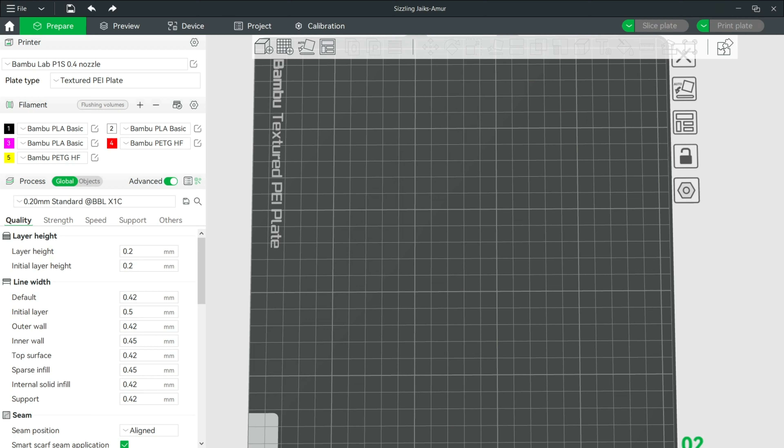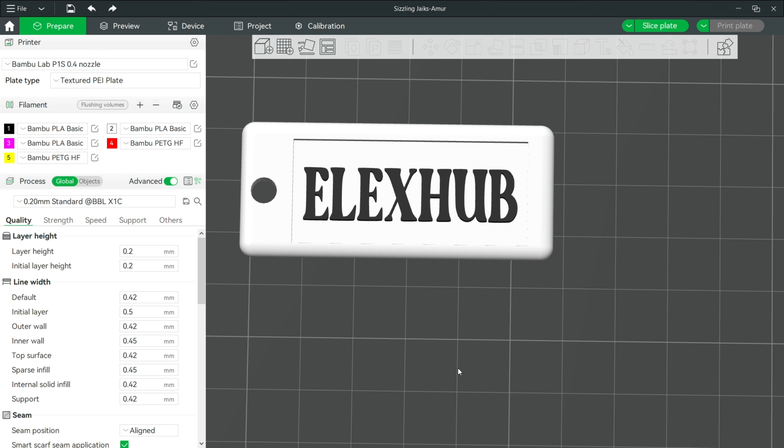Kung nagsisimula ka pa lang sa 3D printing, mahalaga maunawa ng infills for optimizing both the strength and efficiency of your prints. Infill patterns ay ang internal structure ng isang 3D printed object. Sa halip na isang buong material throughout, infill patterns create a framework inside the object. This framework affects how strong or light the 3D printed object will be, how much filament is used, and kung gaano kabilis ang total printing time.

Once you have added your object and done preparing in Bambu Lab Studio, proceed to the Preview tab located on the upper left corner of the studio. Under the Process tab on the left panel settings, click on the Strength tab, scroll down until you see the Sparse Infill section.

Ang sparse infill density refers to the percentage kung gaano kabuo ang internal structure ng object. 100% means solid throughout. Higher density results in stronger prints, longer printing time, and more material usage.

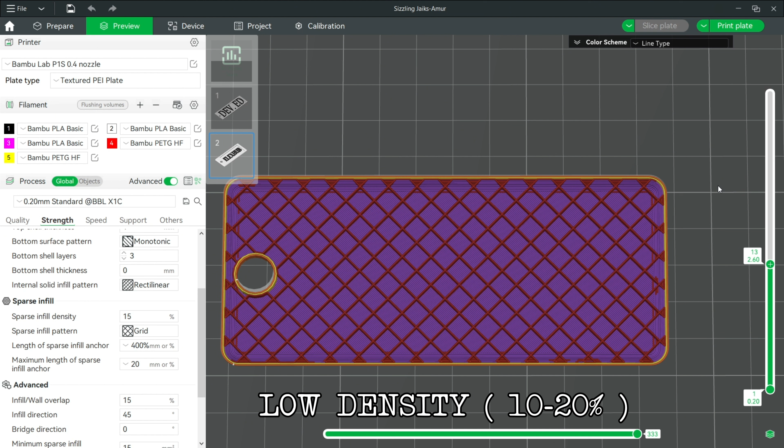Low density, ranging from 10 to 20%, best for decorative items or quick prototypes. The print is lighter and faster but weaker.

Medium density, ranging from 30 to 40%, a good balance for most general prints that need moderate strength. High density, ranging from 50 to 100%, for prints that need to be strong and durable, like functional parts or items under stress. Simply adjust the density based on your needs.

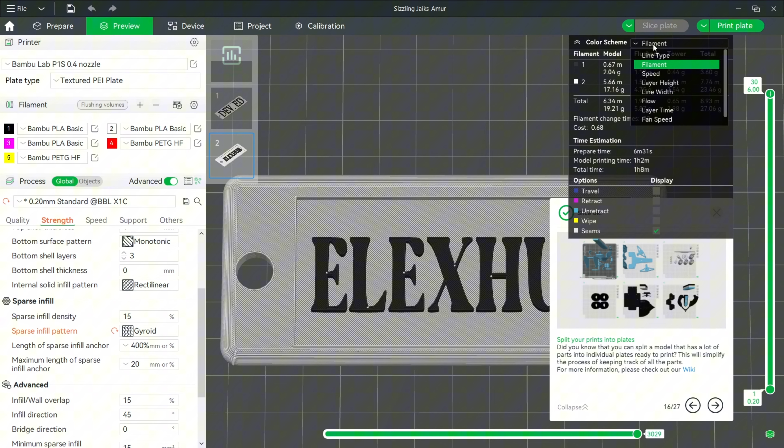Bambu Lab Studio offers a variety of infill patterns, each with own strengths and weaknesses. Ang mga sumusunod ay ang karaniwang ginagamit na infill patterns. Gyroid, isa sa paborito at best infill pattern dahil this provides support in every direction due to its complex and curved structure. Furthermore, this is excellent for prints that need both strength and efficiency while using less material.

Honeycomb, ang infill pattern na ito consists of hexagons. This is great for its mechanical resistance, making this ideal for prints that require a high strength-to-weight ratio such as mechanical parts.

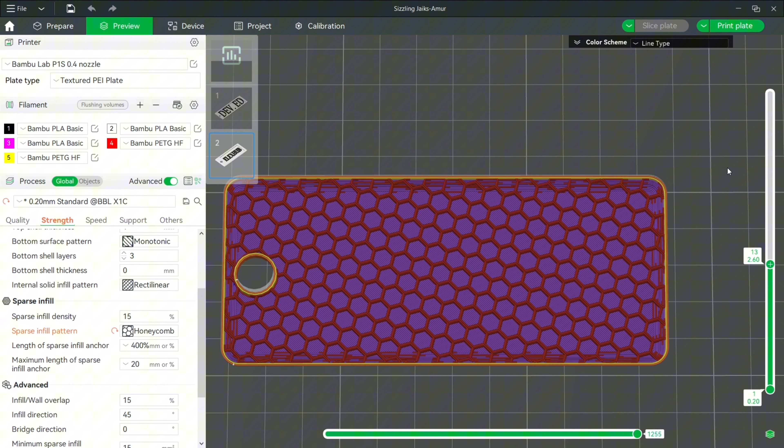Cubic, ito ay isang simple infill pattern consisting of cubes stacked in different various directions. This is ideal for prints that need to be durable and withstand forces from various angles.

Grid, ito ay isa sa simplest and fastest variants of infill pattern. This pattern consists of straight lines that cross each other in a grid-like structure. It is simple and commonly used for general prints.

Line, isa sa mga infill pattern that doesn't feature any crossing paths in a layer. This infill pattern prints a series of straight lines inside the object, usually laid down in one direction at an acute angle.

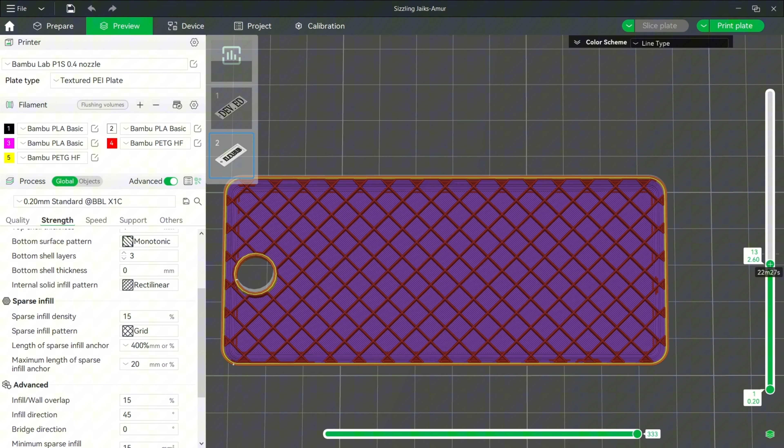For strong, durable prints, use gyroid, honeycomb, or cubic. For fast and lightweight prints, try grid or line. For balanced prints naman, experiment with the density settings to find the right balance for your project.